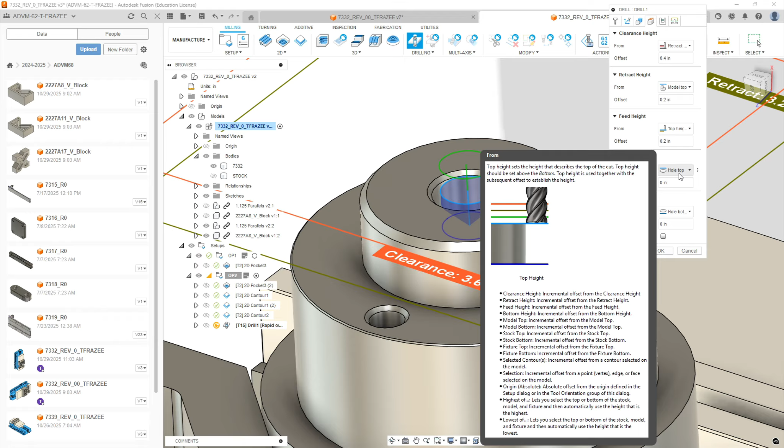So we're going to go to geometry and we're going to select just the chamfer. On height, we're going to go from model top, and we're going to go from hole top, but also this one, instead of going to hole bottom, we don't want to go that deep. We're going to go to hole top also, and then we're going to put a negative value in. So we're going to put in negative 0.125, and so we're making just a dimple that's wider than the web of the drill that's coming in next.

Okay, and the next tab, we are going to do deep drilling. It's going to only take 2 pecks, but we'll do deep drilling, and that makes sure it clears any aluminum out of that spot drill before it goes to the next hole.

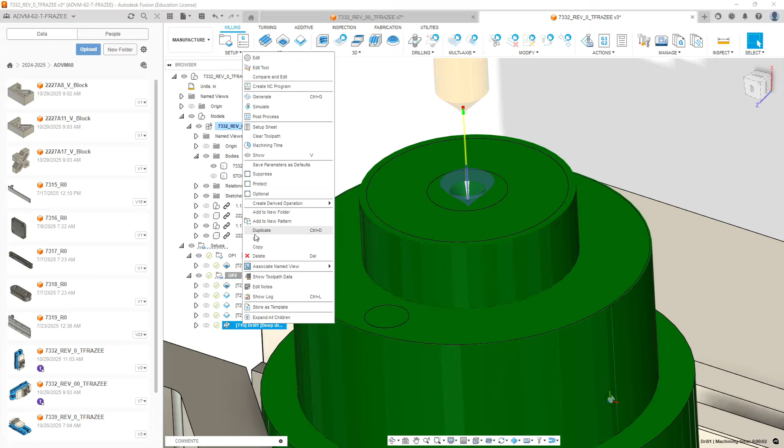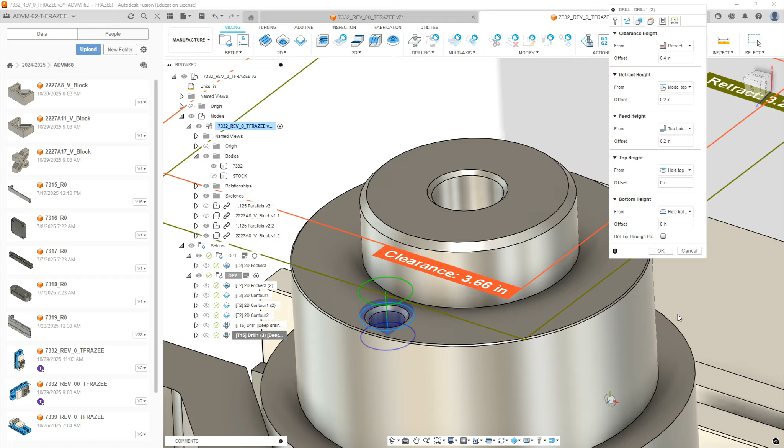Alright, so now we're going to do the same thing. We can basically duplicate this routine, and we're going to edit, and we're going to just clear out the geometry and pick a different face, which would be this countersink here. And then on the heights tab, we are going to clear out this offset, and we are going to go from hole top to hole bottom, because that one will control the depth of where we want it to go. And on the linking tab, we'll keep all that at default, hit OK. Alright, so there's our 2 spots.

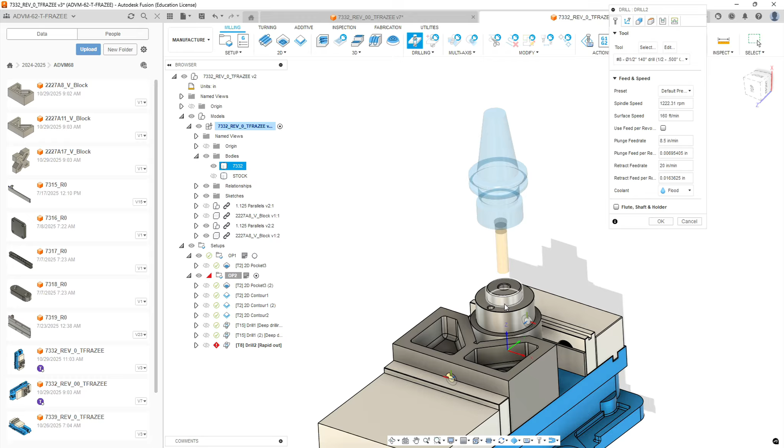Okay, next we're going to drill through the center here. We want to do that pretty much right after we've made this concentric. So we're going to go drilling, and we're going to need to modify the drill that's used. So we're going to go to the revision 1 library, and we are going to use the 1/2 inch drill, but we're going to modify what's used just for this setup in this program. So do not change your main library. We're going to edit just this tool within this instance.

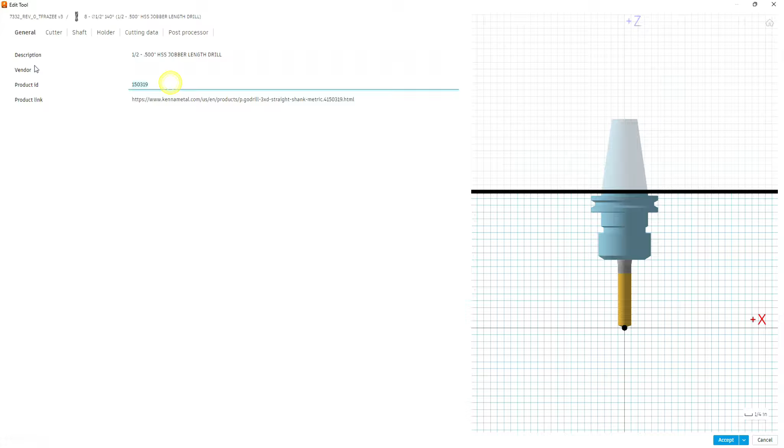Okay, so we are going to use a 1/2 inch. We need to use something longer because this one isn't long enough, and it has a larger shank than what the diameter of the drill is. So we're going to use a high-speed steel. So let's put in HSS jobber length drill. Okay, it's a lot longer. It's not going to be Kennametal, so we're going to delete that. So it's going to be a high-speed steel, cheaper drill bit.

Okay, on the cutter side, what we need to do is we need to change our overall length to 6, and then the length below holder is going to be 3.5, and our shoulder length is going to be 3.25. Our flute length is 3.25, so this is a much longer drill, and our drill point is 118 degrees because that's a standard drill, not a carbide or high performance drill.

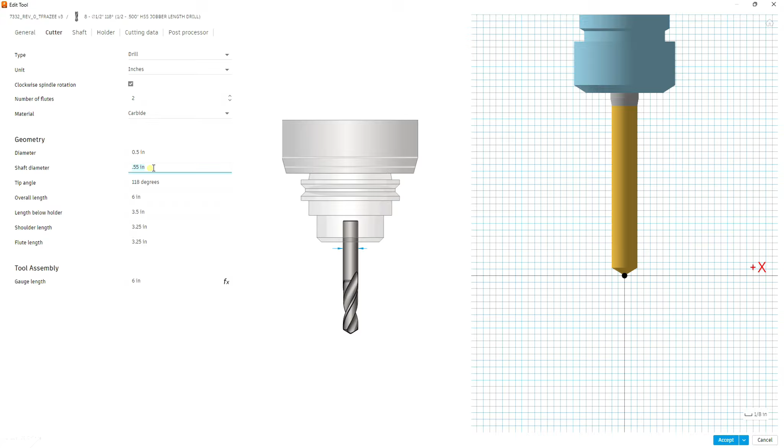Okay, so now we're going to go to the shaft. Oh, and our shaft diameter is the same, so 0.5. Also change the material dialog box from carbide to high-speed steel. Alright, so then we go to the shaft, and there was a custom shaft made on this. So we're just going to set that at 0.5 also. So when you're all said and done, this should look like all the same diameter. On holder, we're going to leave it the same. Cutting data, we're going to leave it the same.

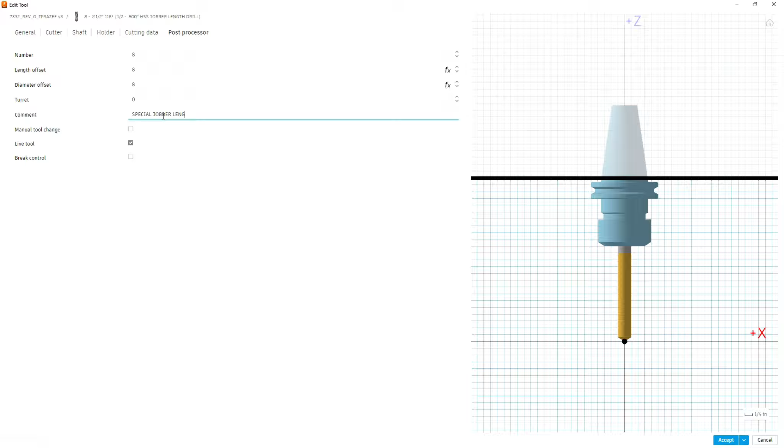Post processor, let's put a note: special jobber length drill. Okay. We want to make sure you need a longer drill. We don't want to be crashing it using the carbide drill, so we need to control that. We're going to leave the feeds and speeds the same. They seem to behave pretty well.

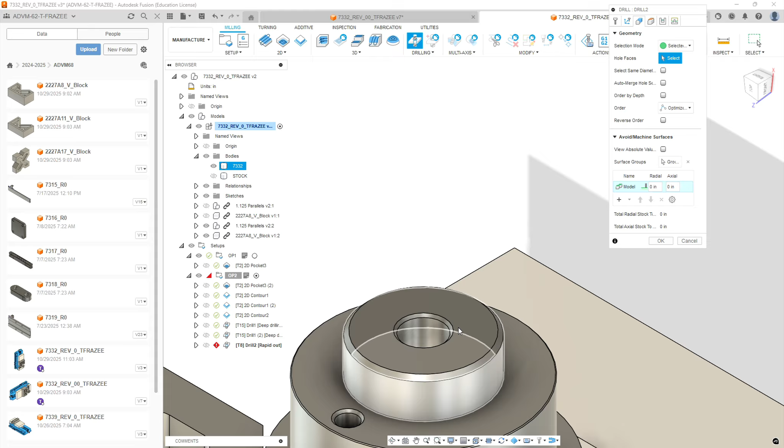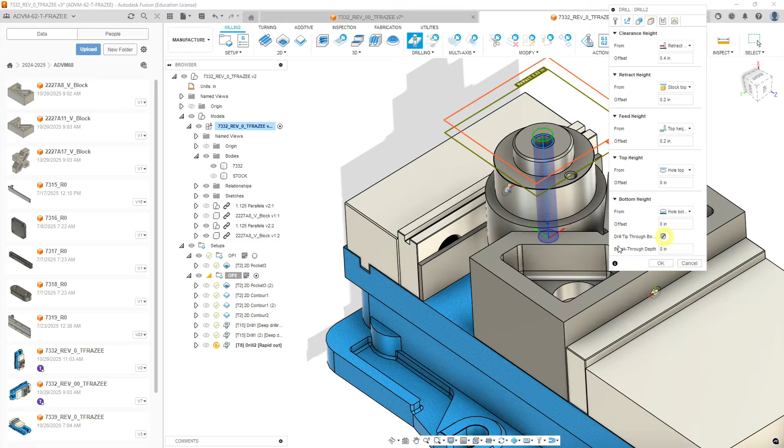And then we're going to go to geometry, and we're going to select the countersink, the hole, and the countersink on the opposite side so that we go all the way through the part. In our heights tab, we're going to go from model top, then we're going to go from hole top to hole bottom for the cutting. We do want to break through, and we want to go 0.1 deeper. That way we make sure we clear all the way through the part. On the next tab, we're going to do deep drill cycle, leave this at default and hit OK. Alright, so there's our 1/2 inch drill.

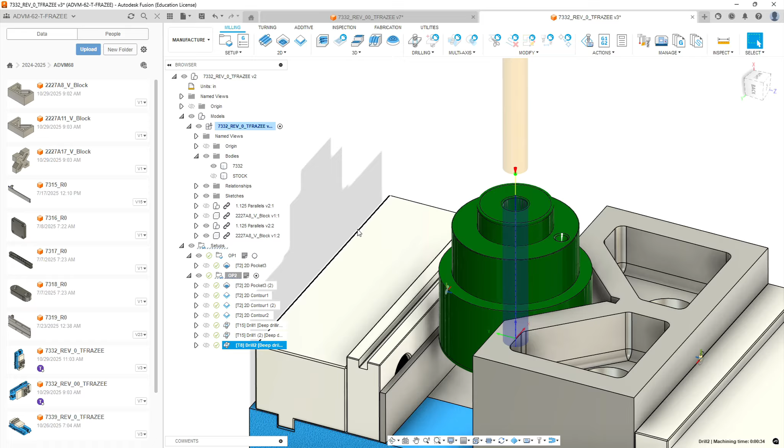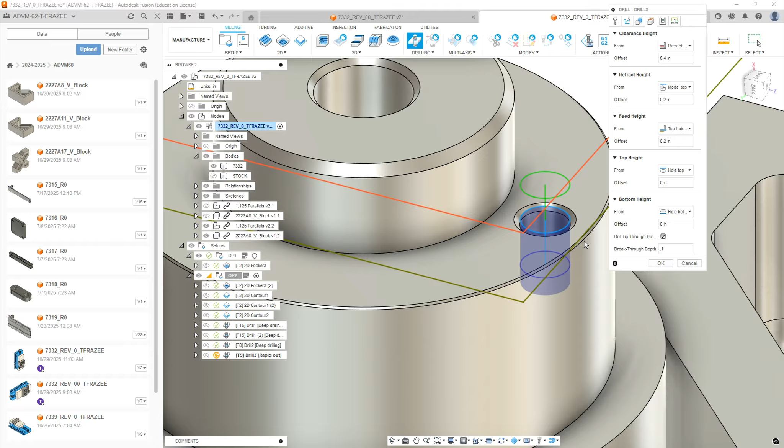Now we're going to drill and ream this hole. So let's go back to drilling. We're going to select from our tool library the standard number 9, which is the letter D drill. Leaves enough clearance for a 1/4 inch reamer. Should be able to leave everything here at default. Geometry wise, you're going to pick the countersink and the hole itself. And on the heights, again, we're going to go to model top, and then you're going to go hole bottom. We want to break through so the drill tip goes the correct depth, and we're going to go 0.1 deeper. We want to make sure that our reamer doesn't hit bottom.

Okay, so you should have built up a reamer in another assignment. There's a video attached to this assignment on how to do that. It's been used on several different projects. Mine's already built up, so I'm going to go to drilling, and I'm going to select from my library my reamer that I've created, and leave all the speeds and feeds in default if you built it to the spec sheet. Under geometry, we're going to select our hole and our countersink. Under cycle, it's reaming, so we just leave that and hit OK.

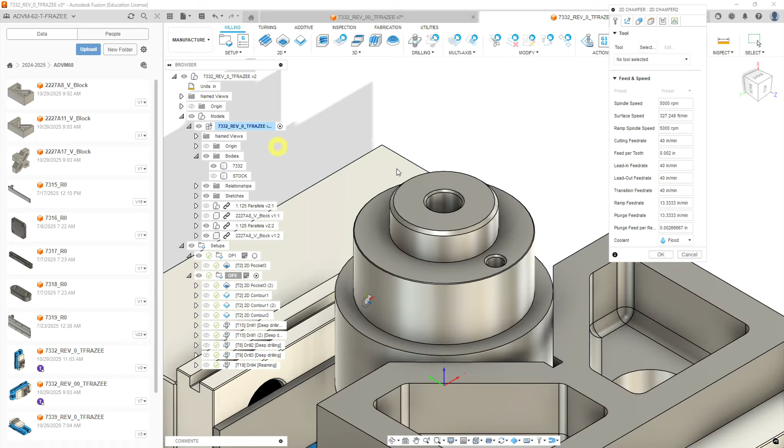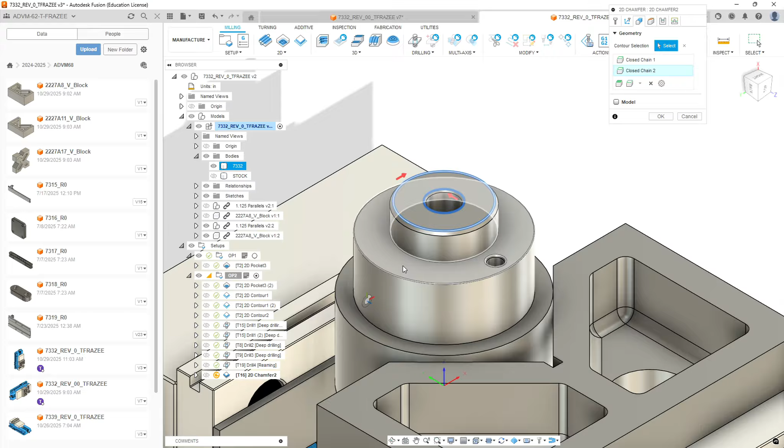Alright, now all we have left is chamfering. 2D chamfer, and we're going to get from our aluminum library the 1/4 inch chamfer mill. We're going to leave everything on the first tab at default. We're going to go to geometry, and we're going to pick the top of the hole, the top of the boss, the top of the second boss. So those 3 loops, make sure the arrows are all on the correct side of what you picked.

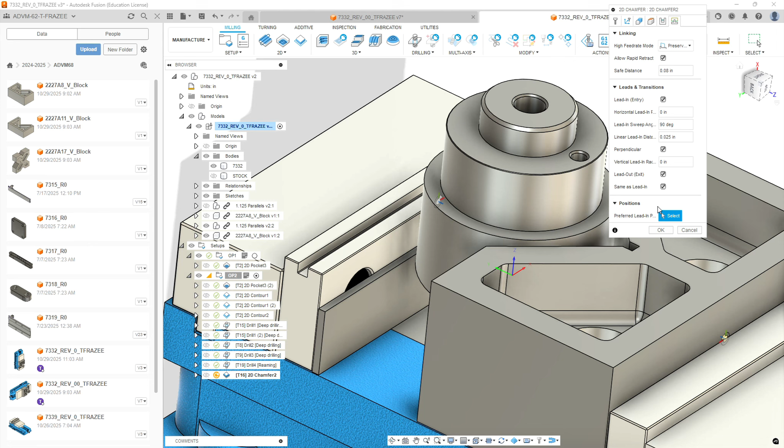Heights, we're going to go from model top and model top. On the next tab, we're going to bump our chamfer tip offset to 80 thousandths. We'll go ahead and check smoothing. And then we're going to go to linking tab. We're going to leave all this at default. And we'll hit OK. Okay, congratulations, you're done programming this. Remember, you need to submit setup sheets and NC code in the assignment for both operations.